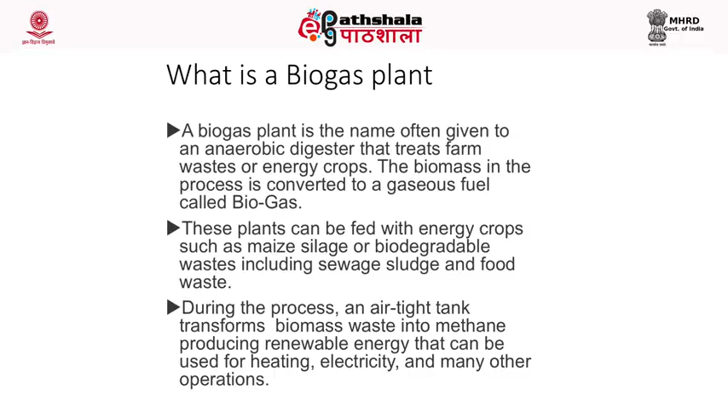The slurry obtained from the biogas plant is richer in nutrition and is an excellent organic farm manure. Next is the type of biogas plant.

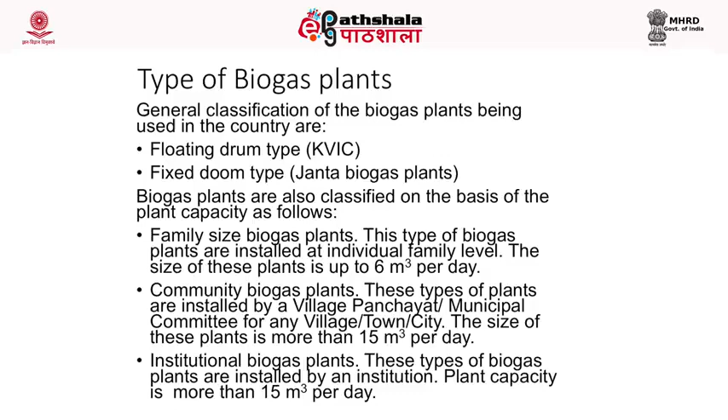The most important types of biogas plants used in India are the Janta fixed dome type, and the KVIC floating drum type biogas plants. The Janta biogas plant is further divided into Deen Bandhu fixed dome type plant and Shramik Bandhu biogas plants.

Now the KVIC plant, which is a floating drum type of plant - KVIC means Khadi Village Industries Commission - its initial cost of installation is much higher compared to other plant types.

Cost of repair and maintenance during operation is relatively high. The steel gas holder needs to be replaced due to corrosion, which is generated due to water vapors and organic acids formed during the anaerobic digestion process. Life of the digester is expected to be 30 years, while that of the gas holder is 5 to 7 years, meaning it needs replacement after every 5 to 7 years throughout the life of the biogas plant.

The drum, which is exposed over the ground, does not allow the use of space over the plant for other purposes. As the gas holder is metallic, low temperature during winters affects the gas production.

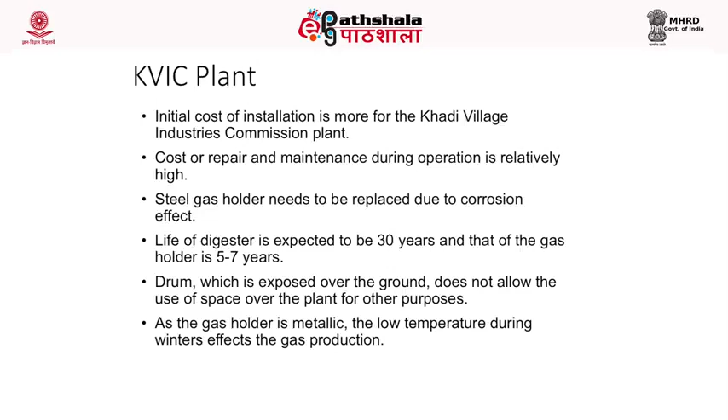Because of the lower atmospheric temperature, the temperature of the slurry drops due to the metallic gas holder, and the low temperature affects gas production and the bacteria as a whole. The gas production in winters drops significantly in KVIC plants.

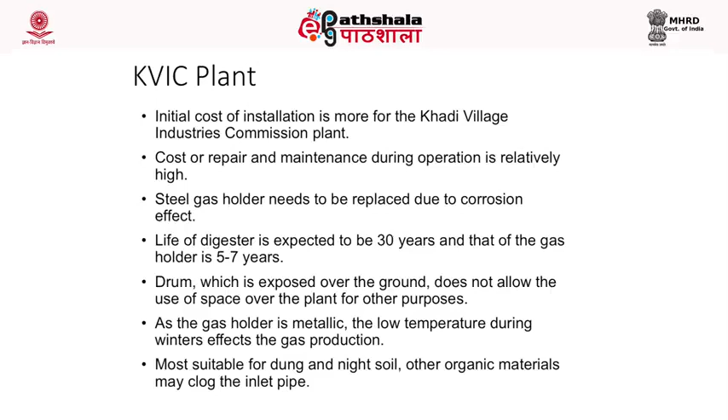It is most suitable for cattle dung, night soil, and other organic material, but may clog the inlet pipes. So crop residues like straw, etc., if not properly ground, can cause operational problems in a KVIC plant. But it is suitable for animal excreta and night soils.

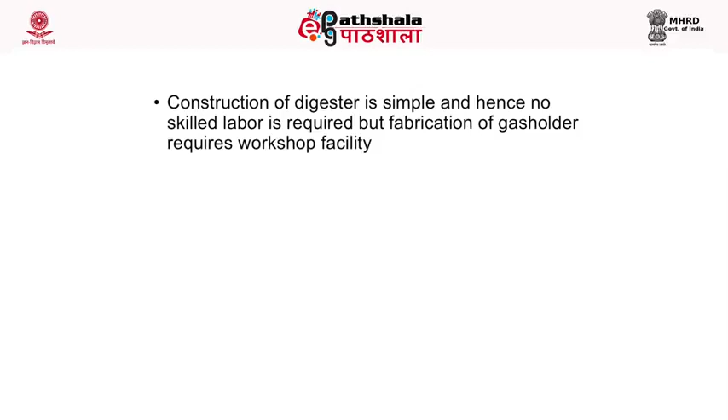Construction of the digester is simple and hence no skilled labor is required, but fabrication of the gas holder requires workshop facility. It requires less excavation work during installation.

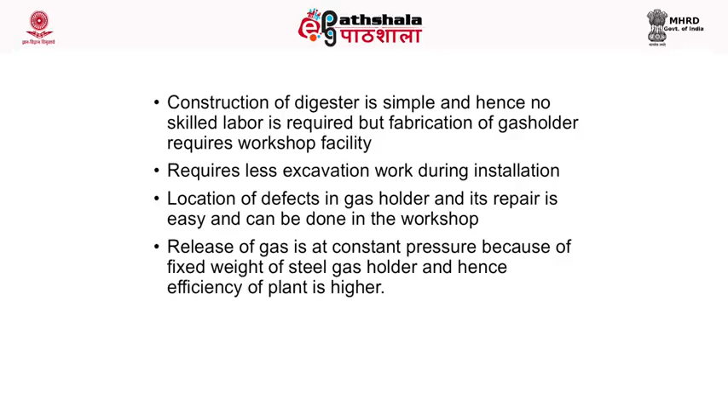Location of defect in the gas holder and its repair is easy and can be done in the workshop. Release of gas is at constant pressure because of the fixed weight of the steel gas holder, and hence efficiency of the plant is higher.

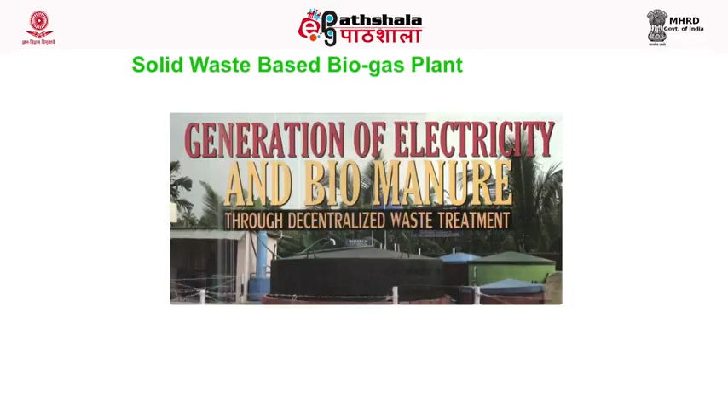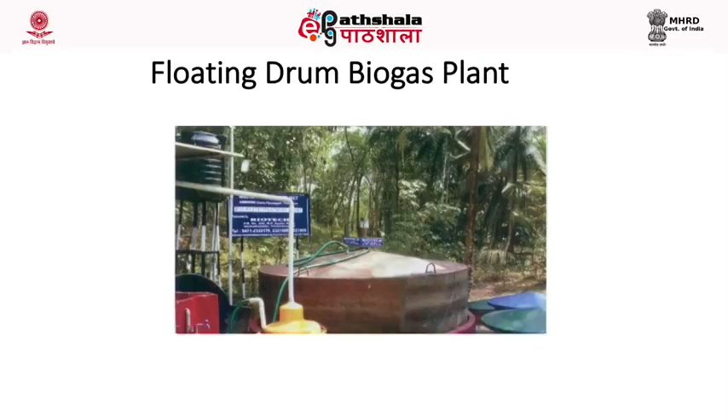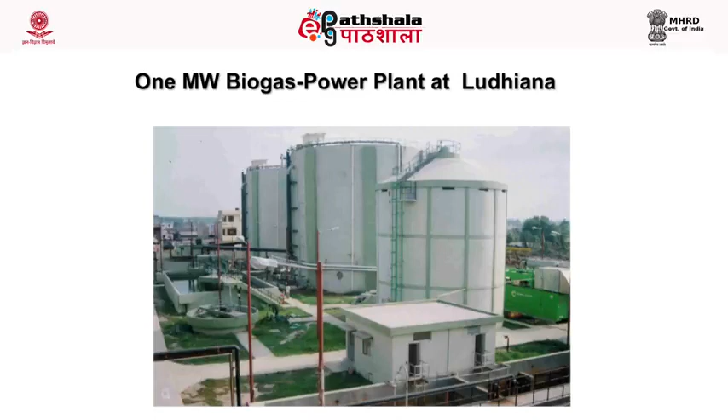This is another biogas plant having the capacity to generate gas for operating a 1 megawatt engine. So this whole plant is a 1 megawatt electricity generation system using biogas and is operational at Ludhiana. The feedstock for this biogas plant is dairy waste.

Now the main characteristics of the fixed dome type biogas plant: capital investment for a corresponding size KVIC plant is less. As there are no moving parts, the maintenance cost is low.

Steel gas holder is not required. Life of the plant is expected to be comparatively more. As the unit is underground, the space above the plant can be utilized for other purposes. The effect of low temperature, especially in winters, is less in fixed dome type biogas plants compared to KVIC plants.

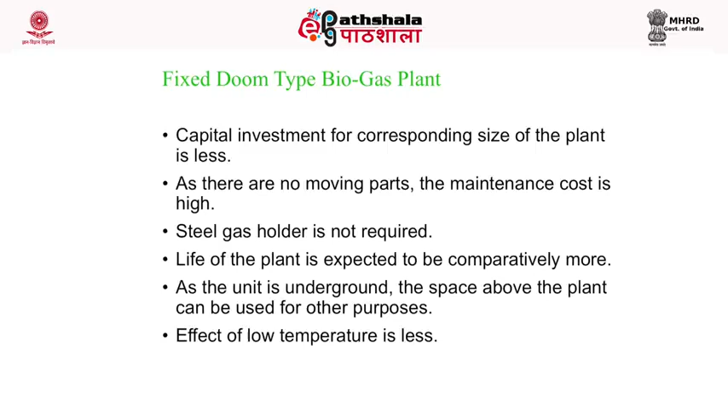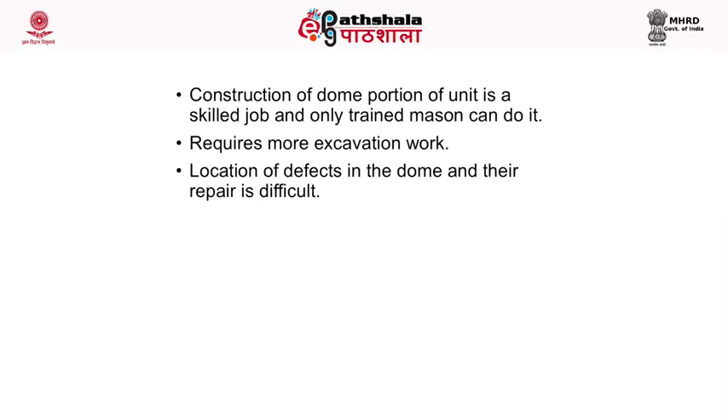Construction of the dome portion of the unit is a skilled job, and only trained masons can do it. It requires more excavation work. Location of defects in the dome and their repair is difficult. Release of gas is at variable pressure, which may cause a reduction in efficiency of the gas appliances. However, it could be easily modified and adopted for use with other types of organic waste.

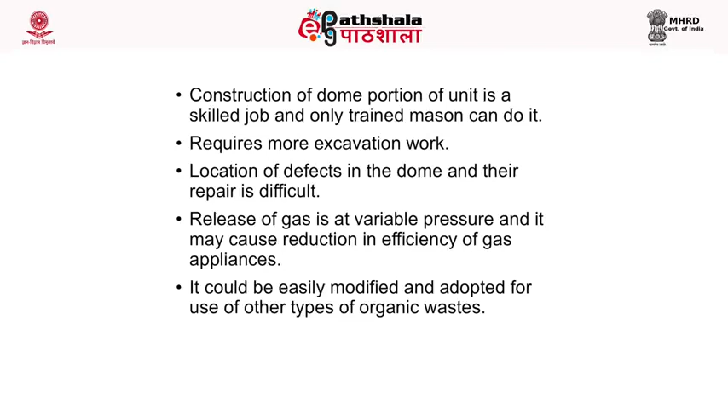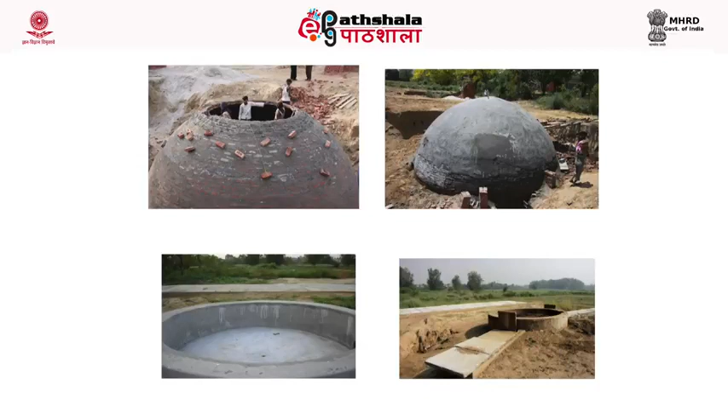These are some photographs of a fixed dome type biogas plant. This picture shows the different construction stages of a fixed dome type biogas plant with a capacity of 100 meter cube.

Now, what is biogas? Biogas typically refers to a gas produced by the biological breakdown of organic matter in the absence of oxygen. Biogas is produced by anaerobic digestion or fermentation of biodegradable materials such as biomass, manure, sewage, municipal waste, green waste, plant material, and energy crops. This type of biogas comprises primarily methane and carbon dioxide.

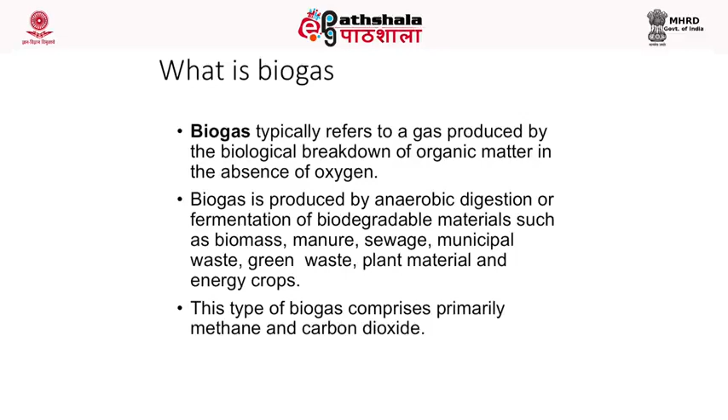This is the composition of biogas: methane and carbon dioxide. Methane is around 60%, carbon dioxide around 40%. It contains hydrogen sulfide, which is less than 1%, and hydrogen, which is 1 to 2%. The heating value of biogas is 18 to 20 megajoules per meter cube.

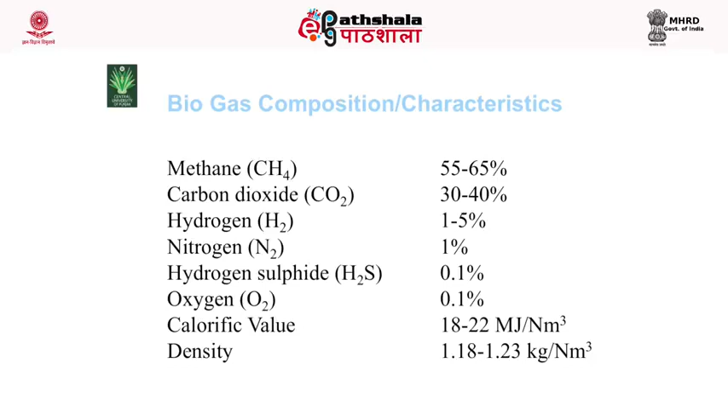Now, biogas application norms. These are norms arrived at based on experience by many persons. For cooking for one adult person, the gas requirement per day is 0.4 meter cube. For lighting a 100 CD intensity lamp, the gas requirement is 0.12 meter cube per hour. For engine operation, the gas requirement is 0.5 meter cube per horsepower, or 0.75 to 0.8 meter cube per kilowatt hour of electricity generation.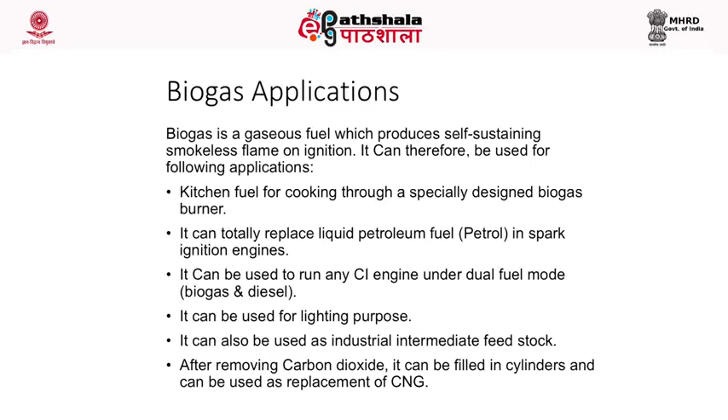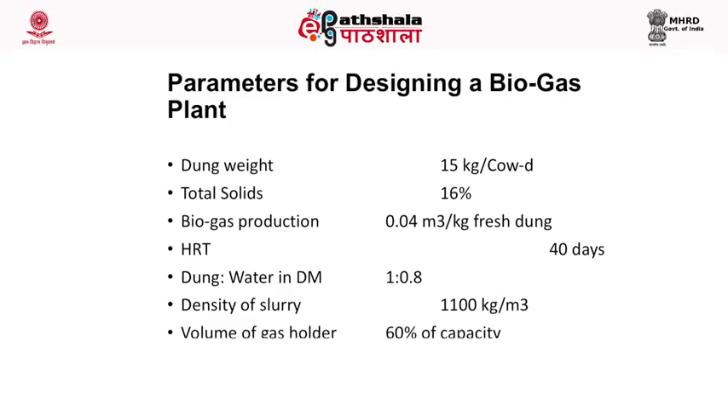Now, the parameters for designing a biogas plant, also based on data available in the literature. The dung obtained from one cow is 15 kilogram per day, and the dung contains a total solid content of 16%. Biogas production from the dung is 0.04 meter cube per kg of fresh dung. Hydraulic retention time is considered as 40 days. This is actually a function of the atmospheric temperature. In hilly regions where ambient temperatures are lower, the hydraulic retention time is considered as 50 days for completion of the biogas production cycle. In other plain areas, it is 40 days.

Now, for preparing the seed or feed slurry for the biogas plant, the dung to water ratio is 1 to 0.8, and the density of the slurry obtained is 1100 kilograms per meter cube. Volume of gas holder, for a KVIC plant, is 60% of the total capacity of the plant. For the volume of digester, whatever we calculate, keep 20% in excess of that design value.

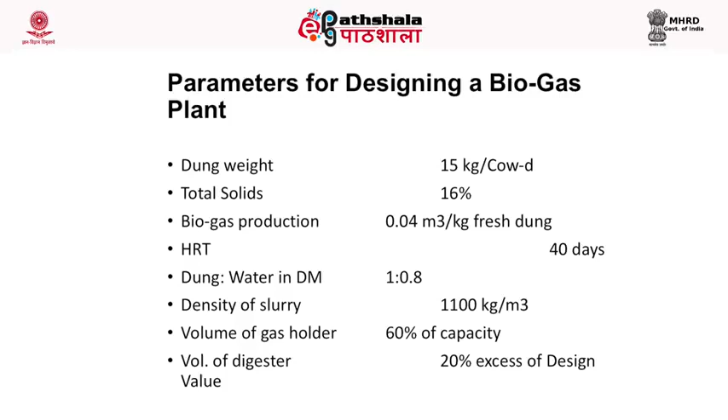Now, this example shows the design of a biogas plant for meeting the cooking requirement of a family of 6 adult members, running an engine generator of 5 kilowatt capacity for 4 hours a day. We have to determine: A, the quantity of biogas required per day; B, quantity of cattle dung and number of cattle required; C, the volume of the biogas plant gas holder; and D, the volume of digester.

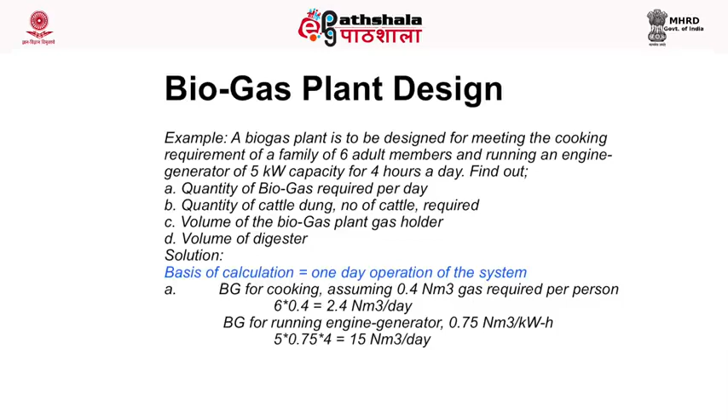Now, for solving this problem, consider the basis of calculation as 1 day of operation of the system. Biogas for cooking, assuming 0.4 normal meter cube per person per day, comes out to be 2.4 normal meter cube per day for 6 persons.

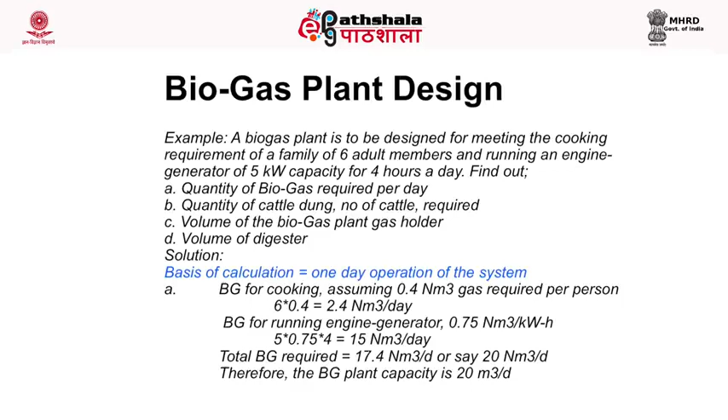Now, considering the operation of a diesel engine generator set consuming 0.75 normal meter cube of biogas per kilowatt hour generation, the total gas requirement for running a 5 kilowatt engine for 4 hours a day comes out to be 15 normal meter cube per day. The total biogas required for these two applications comes out to be 17.4 normal meter cube per day, or let us say, for design purpose, 20 meter cube per day. So this means we have to design a biogas plant for 20 meter cube per day of total gas production.

Now, B is the cattle dung required, assuming 0.04 meter cube of biogas production per kilogram of fresh dung. The total dung required comes out to be 500 kilograms, and considering 15 kilogram of dung produced by one cattle, the total number of cattle comes out to be 33.3, or let us say 35. So 35 cattle are required to produce the dung, which is enough for producing 20 meter cube of gas per day.

Water required to prepare the digestion mixture or seed slurry, assuming 80% of water required based on the weight of the dung, comes out to be 400 kilograms. The total weight of the digestion mixture, thus 500 plus 400, comes out to be 900 kg.

Now, volume of the digestion mixture per day is the total feed slurry digestion mixture divided by the density, which is assumed as 1.1 grams per centimeter cube, and the total volume comes out to be 818 meter cube.

Now, volume of the digester is the volume of digestion mixture, in meter cube per day, multiplied by the hydraulic retention time plus the free space in the digester. Let us take the free space as 20% and hydraulic retention time as 40 days. So the total volume of the digester comes out to be 39.3 meter cube, or let us say 40 meter cube.

So volume of the gas holder is 60% of the plant capacity, that is 20 meter cube is the plant capacity, so 20 multiplied by 0.6 is 12 meter cube.

So this way, for any specific requirement, the biogas plant can be designed accordingly.

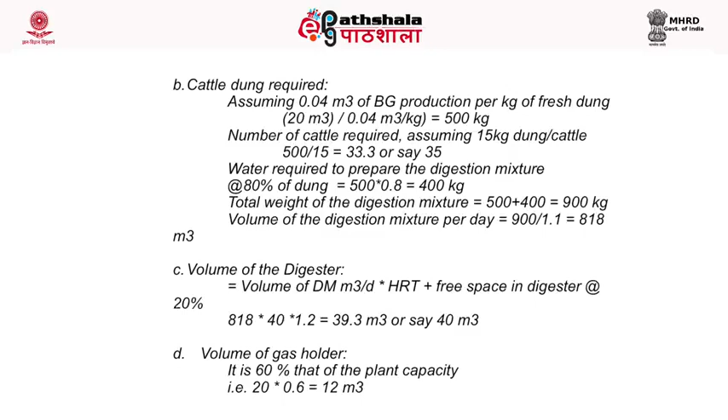Now, the biogas which is generated from the biogas plants contains 60% methane and around 40% carbon dioxide. Now, the carbon dioxide from the biogas generated from the plant can be processed to remove it, and that removal can take place by means of water scrubbing at high pressure, and that may be followed by chemical absorption to remove the carbon dioxide. And once the carbon dioxide is removed from the biogas plant, it is more or less the methane,

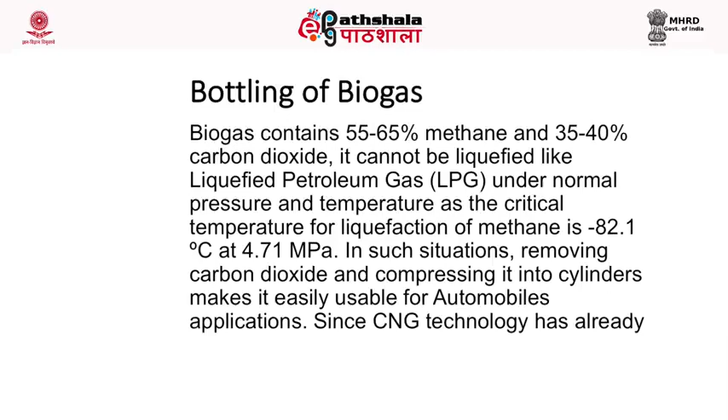So now this processed gas can be utilized in place of natural gas. It can be used as a fuel in kitchen for cooking purpose. It can be used for running the automobiles, and it can also be used as a fuel in stationary engines, as in the case of compressed natural gas.

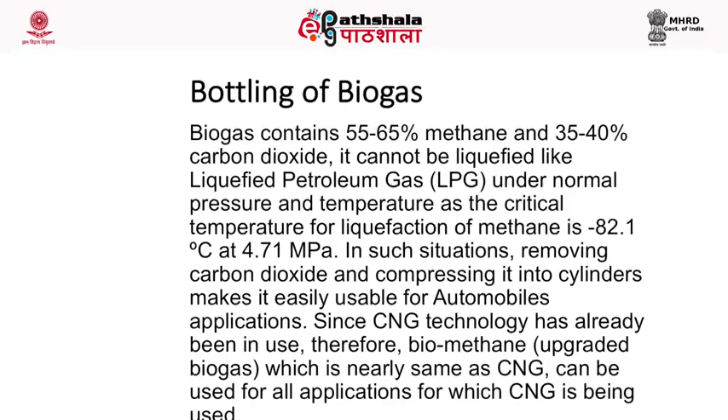Now, some uses of biogas: visible improvement in rural hygiene, environment benefit on a global scale, protects the Earth's natural resources, renewable and decentralized energy source, widespread availability of dung in rural sector of the country, eco-friendly energy production, boon for the rural economy.

Biogas can be used for thermal application. It can be used as a fuel in furnaces, in small and medium industries. It can be used as a fuel for cooking in domestic sector.

It can be used for running the engines. That means it can be used to run a spark ignition engine on the gas alone, and it can be used as a supplementary fuel in any CI engine or diesel engines.

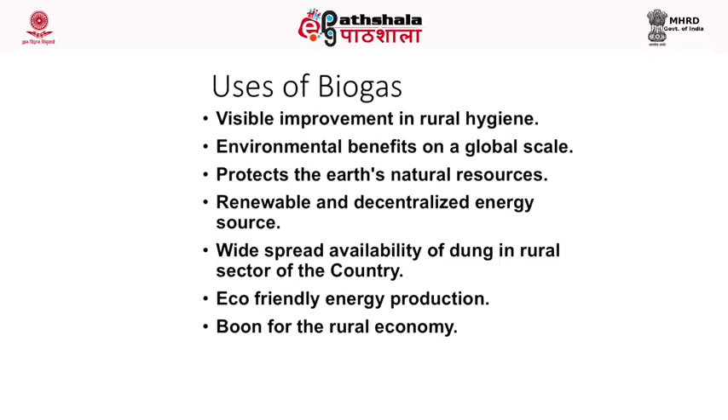Now, the main raw material for biogas production is the animal dung. Its traditional application is the production of dung cake and the application of dung cake as the fuel in domestic sector for cooking purpose.

Now, application of dung cake in domestic sector for cooking leads to a lot of smoke formation during the combustion of the dung cake and creates very unhealthy and unhygienic environmental conditions in the kitchen.

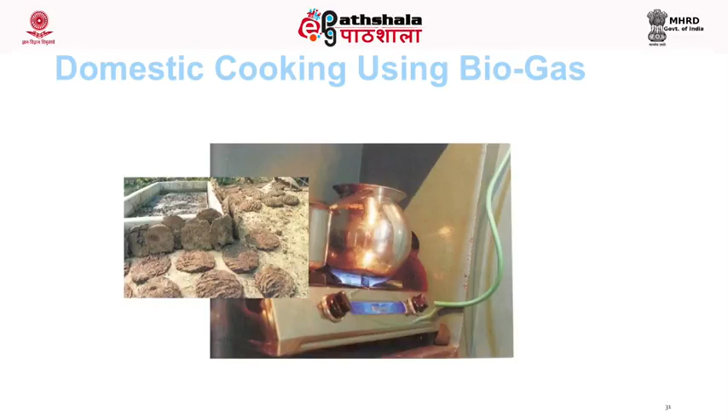The biogas is the product obtained during the anaerobic digestion of animal dung and some selected crop residues.

Now, these materials are traditionally used as a fuel and manure in a very inefficient way.

And if the same material is used after its anaerobic digestion, during that process it is converted into biogas, and the residual slurry, which can be used as farm manure, is much richer in nutrients as compared to the original waste material. And the biogas can be more efficiently utilized as a fuel in domestic sector.

It can be used for running the engines, and it can also be used as a feedstock for some of the chemical industries. Thank you.